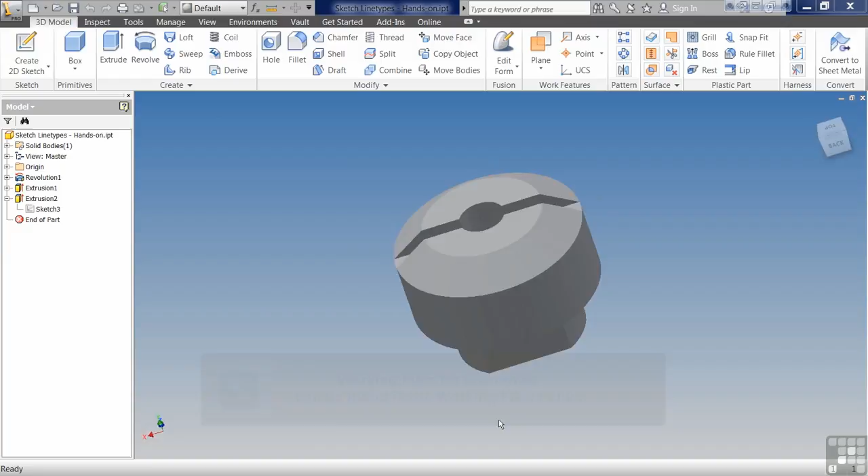The exercise is going to be called Sketch Linetypes Hands-On. I'll have this in the working folder so you can see what it should look like when we get finished.

But to start with, we're just going to go up here to New. We're going to select the metric folder. We're going to just pick the regular standard or metric template. Create. And we're going to create a 2D sketch.

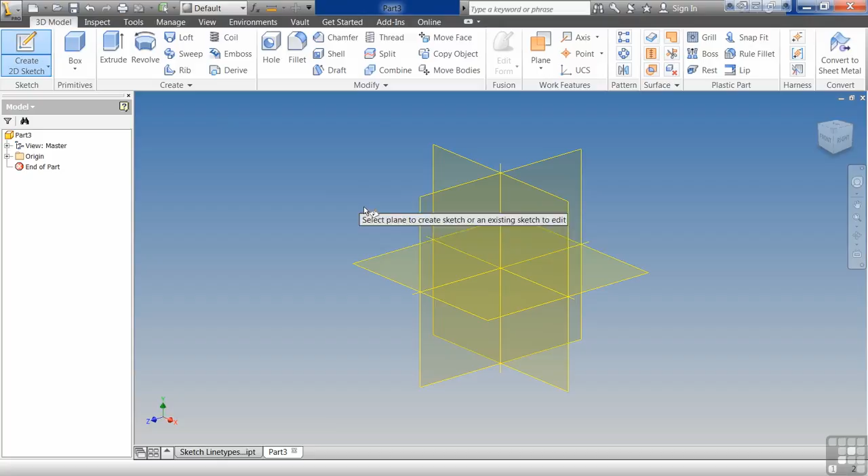And we're going to rotate our plane around so up is up. I don't like it when, for whatever reason, it does it on the side for us. If you want to start from the front, you can pick the other plane, but we're going to be working with up being up, so to speak.

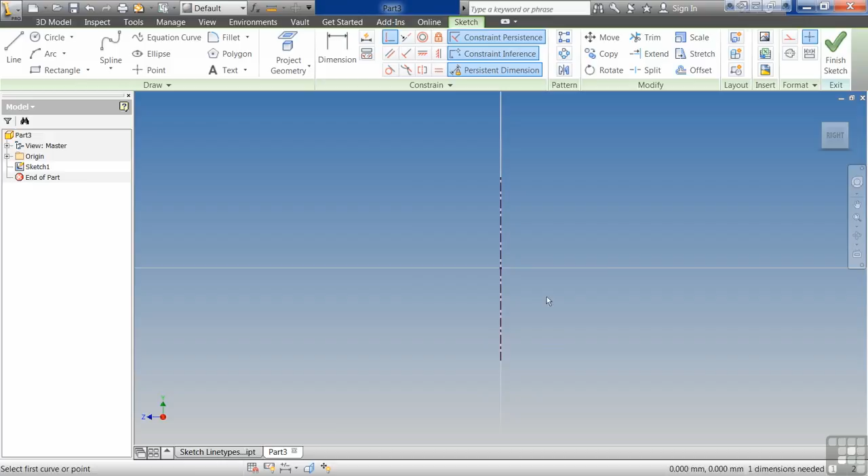So the first thing I'm going to do is draw a line anywhere on my page. I'm going to convert it over to a center line. I'm going to use the coincident constraint to lock down the center line to our origin point. What that should do is give us a way to keep the line from moving around as much on us and give us a good steady working platform to start from.

Then I'm going to sketch out our object. Remember, size really doesn't matter. We're just kind of eyeballing it here. The only thing we're really concerned about is the shape. So I want to get it kind of close.

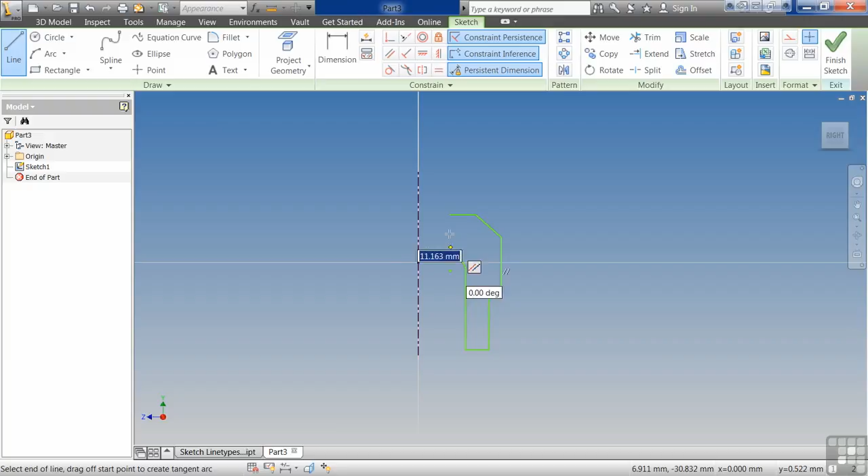And then I'm going to add any constraints. One thing I'm going to do is a coincident constraint from the center point of that circle to that line. I'm going to also do a tangent here. Tells me it already exists. Should have checked it first.

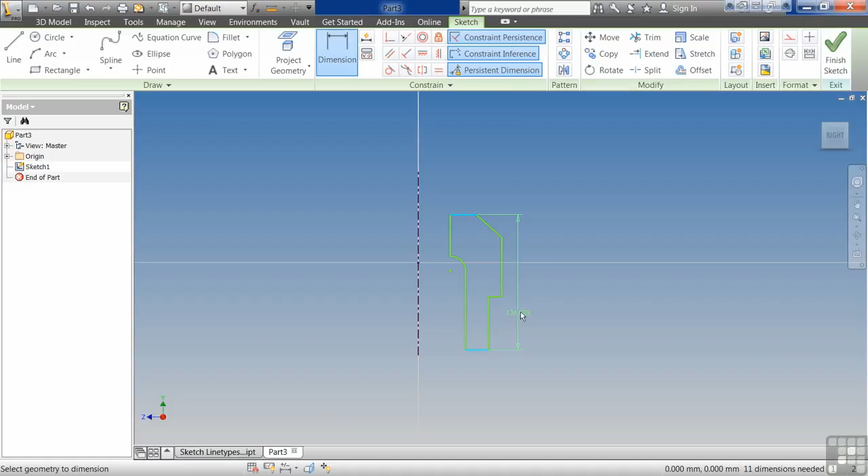Looks good. So I'm ready to start adding dimensions. So I had the overall height of 40 millimeters. It's going to scale it down for me. So I'm going to zoom in here a little bit.

Then I'm going to come in here. And this bottom leg, I'm going to make 6. This top part here, I'm going to make 10. I'm going to make this little projection here a 35-degree angle. I'm going to make this little part here 5 millimeters.

Then I'm going to say this to this will be 12. This to this line here, it's going to be 50. Now you notice it automatically dimensioned my center line. I don't need this, I'm going to delete it. Sometimes it will get a mind of its own and want to do something like that, and that's okay.

So everything looks pretty locked down with the exception of I've still got some green lines. That's telling me I've got some freedom here. I need to fix some of that.

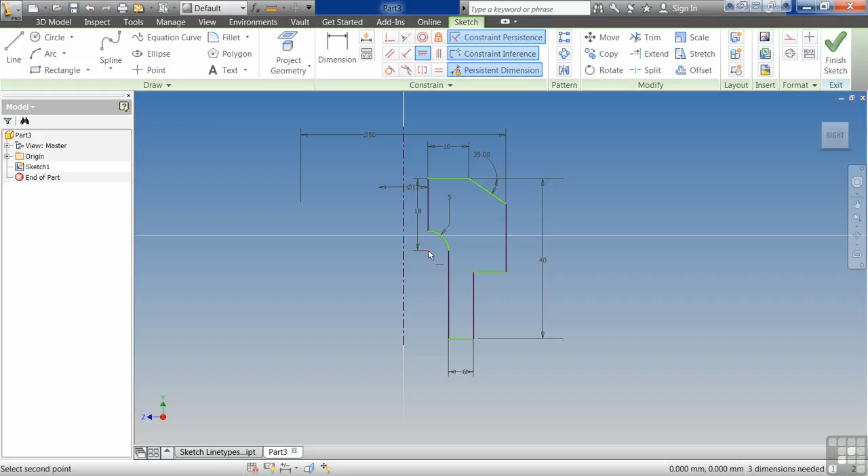So dimension from the center point here to the top. Should be 18. Still got green lines. So I'm going to do a horizontal from the origin point to the center point there. Maybe it's a vertical. Remember I told you sometimes vertical becomes horizontal, horizontal becomes vertical.

So I've got everything locked down, but I've got one more. So I'll do a dimension there. So I locked it down.

And what happened with that horizontal and vertical there is, even though we're showing up is up, remember when we rotated that sketch when we first started it? What happened there is up is really sideways on this sketch. I want you guys to see that because you're going to see this a lot in the real world. Sometimes things get twisted and turned. It's not the end of the world. We just undo and we redo it as a vertical instead of horizontal or vice versa.

So when you get done, your sketch dimension should look something like this. You don't necessarily need to worry about where they're at as much as what the values are. So everything looks good here. We hit finish.

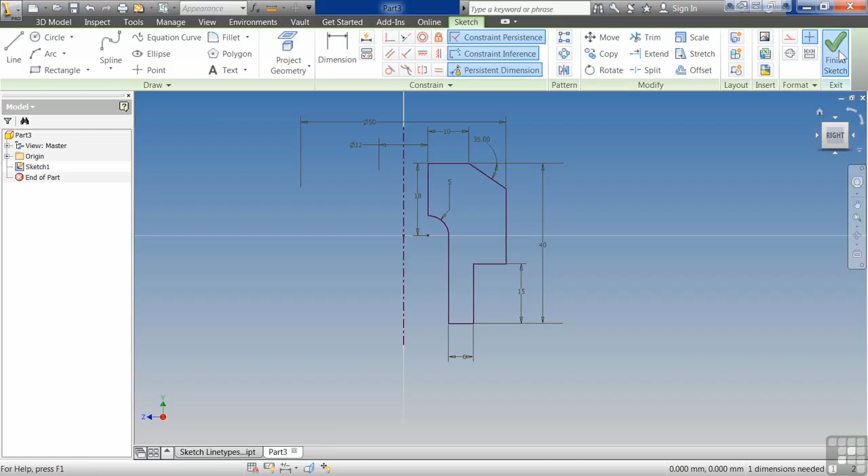And we hit revolve. You can just take all the defaults. It's right out of the gate there. And we have the basis of our part.

So we're going to say create a 2D sketch. Click this top plane. I'm going to draw a rectangle across here, like so. I'm going to exaggerate it on purpose. I want this to be larger than the part. I'm going to project in my outside edge using the project command. I just come up here, I select project, and I select the outer edge.

I'm going to use the tangent command. So I'm going to say this line, tangent to this line, tangent to this line. Then I'm going to use the horizontal command. And I'm going to lock this down so that it makes it symmetrical, basically. I could draw a construction line through there or center line and make a symmetrical constraint, but it's easier just to use that horizontal constraint and lock it down. I'm going to give this a dimension.

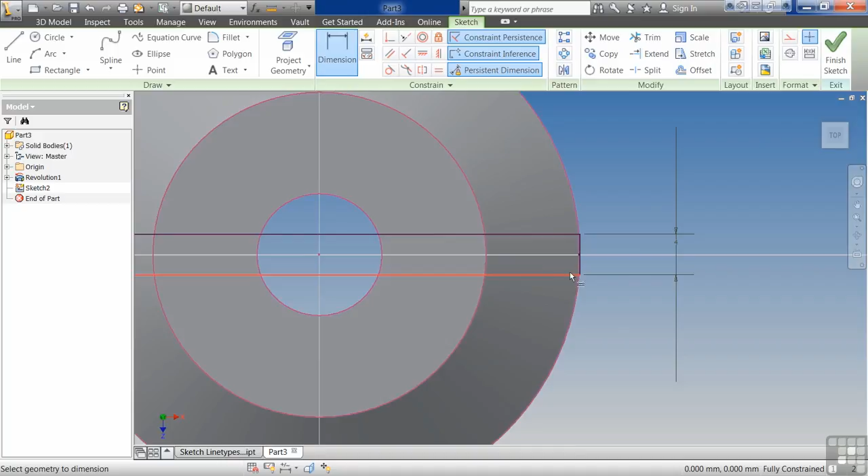So now we have 4 millimeters. I do want to make sure that my rectangle goes outside of my part, and I'll show you why right now. So now we have something like this. We say finish sketch.

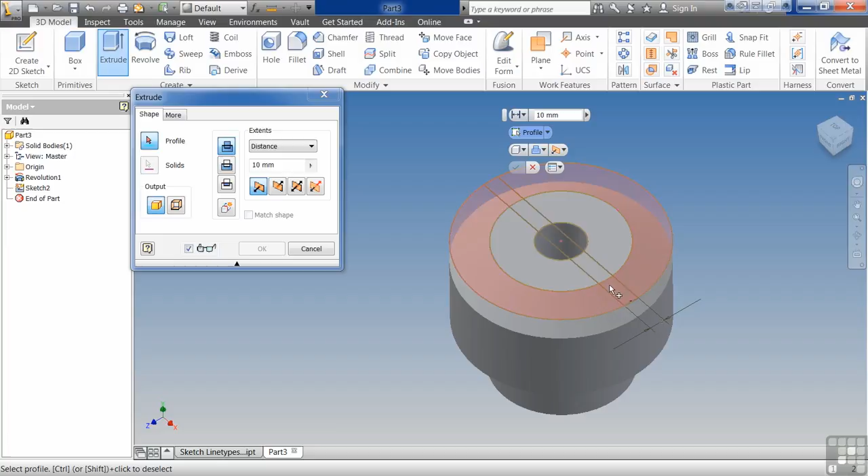Say extrude. With this one, you'll notice we have several different closed areas we could select, so it's kind of hard for Inventor to figure out what you're wanting to do. You could come in here and move your mouse around and get that just perfect. The easy trick here, go to the center. There's not as much for it to choose from, and so it'll just automatically choose the one you want. We select cut, and the distance is going to be 6.3 millimeters.

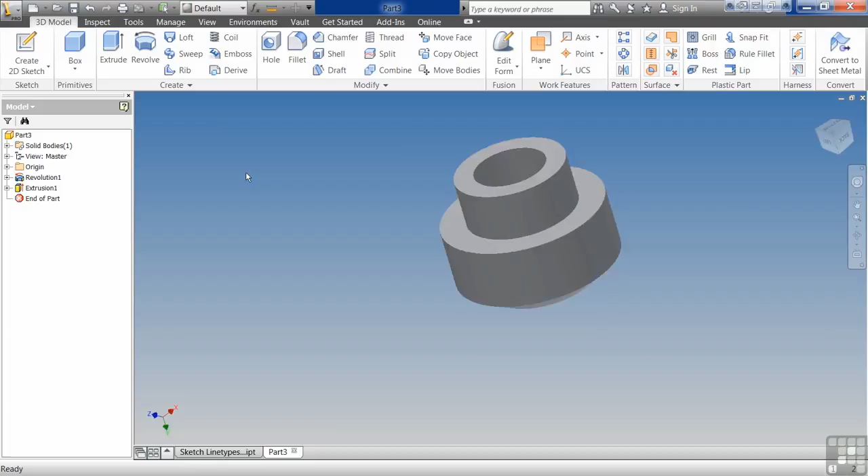Looks good. Next, we're going to put a sketch here on bottom. Say 0. Should be about like that.

And I'm going to do a rectangle and a rectangle. Once again, I exaggerate them on purpose. The reason is if you try to create some little tiny rectangle and you accidentally snap to some geometry inside of this part, then it's very hard to figure out what the constraint is and where it is and what you have to do to undo it. Whereas if you over exaggerate it and then bring it back in, it's easier to handle. It's easier to see, it's easier to manipulate. So I always over exaggerate and then bring it back in. Even my day-to-day designing that I do, I always do this.

I'm going to do an equal so that these are equal in size. I'm going to start the dimension command. I'm going to hit 4 millimeters. There we go. I'm going to once again drag this out. And I want to take a look here. And I'm going to use the tangent constraint again. Select the outside of the line there.

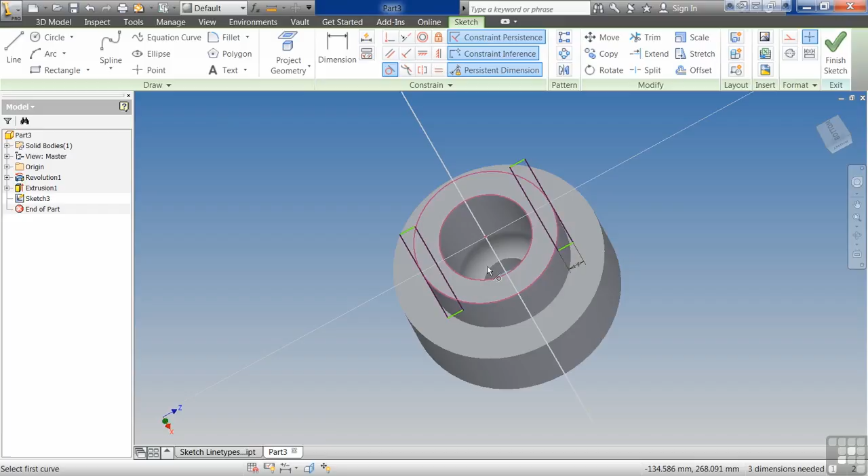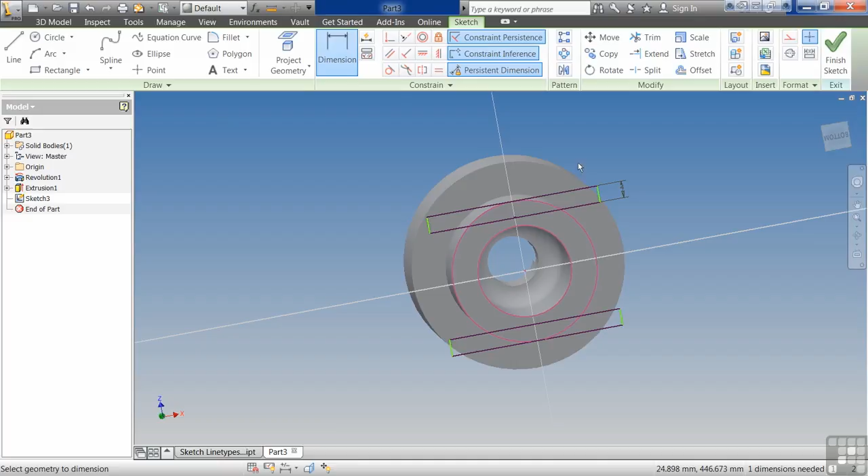You can see we're good. We don't have to lock these down, but we do want to make sure that they are bigger than the object we're cutting. I like to go ahead and put a coincident on there. I can do a vertical lockdown too, so that these will be locked down to the center point here. If you want to add a dimension in here to lock it down, we can.

You know, there's the exception to every rule. You always want to have fully constrained sketches. Something like this, you don't necessarily have to. It's good practice to get used to it.

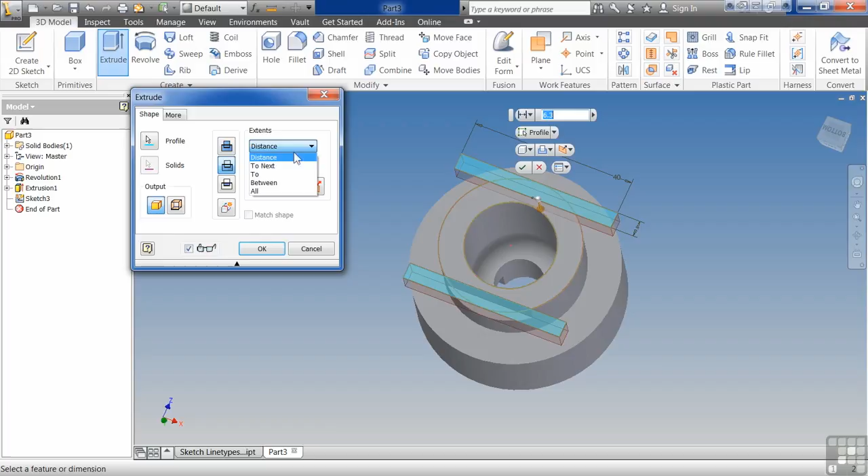Say finish. This time we're going to do the extrude command again. Pick our two rectangles, say cut. And we're going to go to To. And we pick this flat face here. Hit OK. So now that's made it into kind of an indexer.

And we can save this as sketching line types. Save. I'm going to call mine sketching line types hands on. So I don't override yours. I'm going to do 2. Hit save. And we're done.